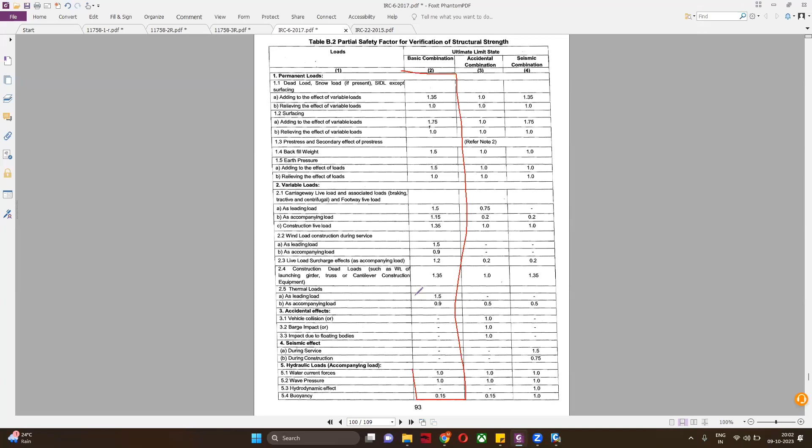अभी बात हमारी लीडिंग और एकम्पनिंग में चल रही थी ना तुम्हारी। तो जैसे इसमें जो कॉलम दिया है वही कॉलम कंसिडर करना है उसके अंदर। अब देखो इसमें ये कॉलम है, ये एक कॉलम हो गया। अब तुम इसके लिए डिजाइन करना चाहते हो, तो यहाँ पे लिखा हुआ है लीडिंग और एकम्पनिंग।

एक बार 1.5 कंसीडर करोगे, फिर बाद के 0.9 कंसीडर करोगे और 0.9 कंसीडर करोगे, एक कॉम्बिनेशन बन गया। दूसरे कॉम्बिनेशन में ये वाला 1.5 कंसीडर करोगे, इसका 1.15 कंसीडर करोगे, इसका 0.9 कंसीडर करोगे। फिर तीसरे में इसका 1.5 कंसीडर करोगे, फिर इसका 0.9 और इसका 1.5 कंसीडर करोगे। तो एक कॉलम के तीन कॉम्बिनेशन बन जाते हैं। ऐसे ही इसमें भी एक कॉलम के तीन बनेंगे, जब लीडिंग जैसे होगा।

तो जैसे अपने इसमें दे रखा है क्वेसी परमानेंट के लिए B3 टेबल का कॉलम नंबर फॉलो करना है। कौन सा, B3 क्वासी टेबल का परमानेंट वाला। तो उसमें सिर्फ बस यही करना पड़ेगा, इसमें लीडिंग कुछ नहीं आता। क्वासी परमानेंट से परमानेंट लोड के लिए होता है, उसके नाम में ही परमानेंट है, तो इसमें वेरिएबल लोड आते ही नहीं।

सिर्फ वेरिएबल के नाम पे एक ही लोड आता है, वो भी थर्मल लोड। कोई और नहीं आता इसमें, ना लाइव लोड आता है ना विंड लोड आता है, सिर्फ एक थर्मल लोड है। तो इसमें कॉम्बिनेशन एक ही बनता है बस। इसके कॉम्बिनेशन अलग बनेंगे क्योंकि इसमें फिर लीडिंग आ गया, इसमें भी तीन तीन बनेंगे, फिर इसमें लीडिंग आ गया, फिर एकम्पनिंग आ गया। क्वासी परमानेंट में नहीं आता लीडिंग कुछ भी। इसमें बस फ्रीक्वेंट कॉम्बिनेशन है।

फ्रीक्वेंट कॉम्बिनेशन डायनेमिक एनालिसिस के लिए करते हैं कौन से? फ्रीक्वेंट? हाँ, करना ही करना है। फ्रीक्वेंट से क्या मिलता है हमें? डिफ्लेक्शन मिलता है। If you want to check your bridge for deflection, then you need to consider frequent. And if you want to check the stresses, you need to consider rare. And if you want to check the crack width, then quasi permanent. Different load combinations will give different values.

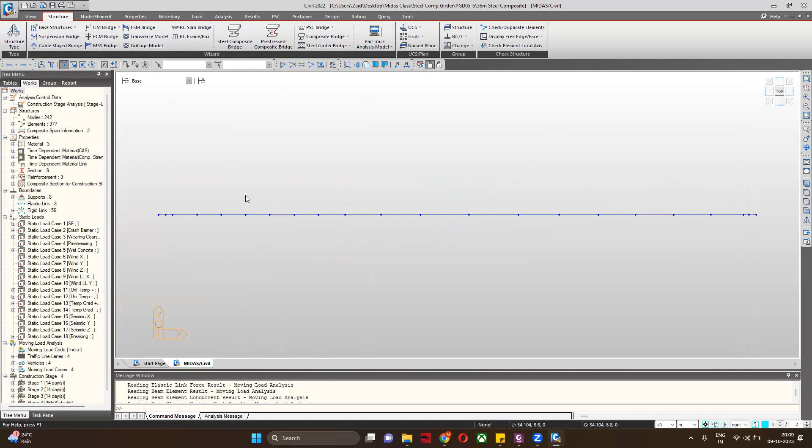Effective width. So I was trying to do it as per code IRC 22. I will show you what is meant by this, also.

But it is still coming empty. Now I will go into boundary, effective width. And from this also, and if I click this thing, okay, if I go back here, I have, okay, that is the thing. Okay, wait a moment.

I have considered this one. So that is why it is giving a problem.

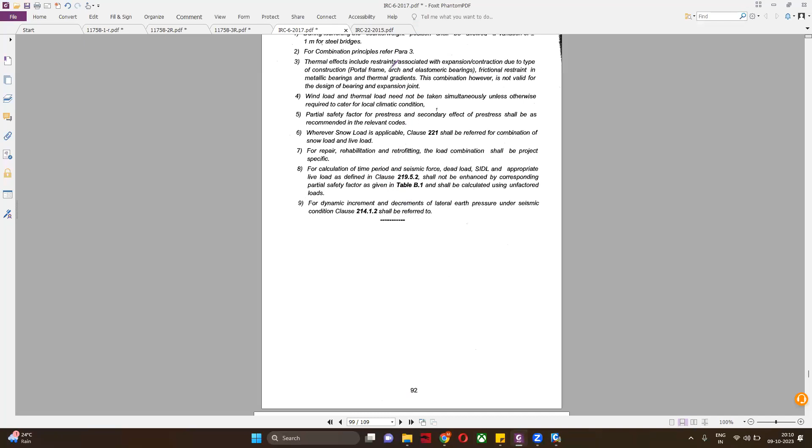Let me delete and delete it because I will show you the code, what I mean by this. If you go into IRC 22 and just go to the initial pages.

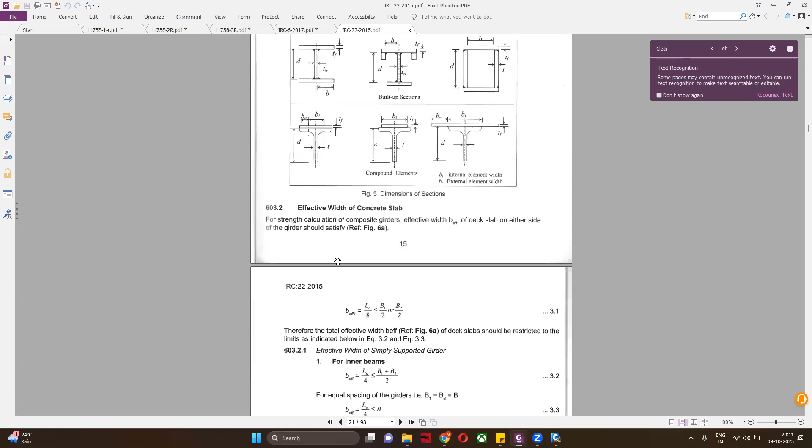There will be effective width calculation. I will go to the last step. First of all, the classification. These are the classifications. This is B, effective width of concrete slab.

It totally depends on: for inner beam, it will be L0 by 4, should be less than B1 plus B2 upon 2. And if B1 equals B2, then B will become L0 by 4. L0 means span. Now our span is 36 meters. So what will be there?

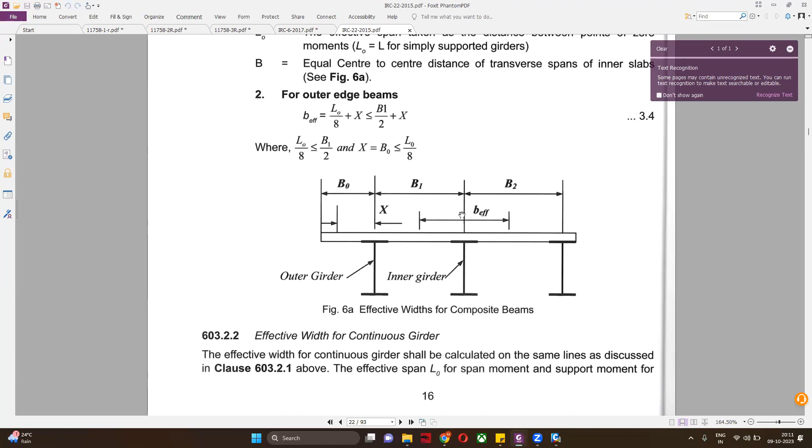Like for shorter span, our effective width changes. But for a higher one, like 36 divided by 4, we get 9 meters, which is pretty much high. So we need to consider the same width, whatever we are getting, like this combination. So B1 is like from one spacing to another spacing, B2 is another spacing, so I'm trying to assign that same thing.

So that is for outer girder, it will be different. For inner girder, outer girder, what will happen? Even outer girder has been mentioned. For outer girder, L0 upon 8 plus X, should be less than B1 upon 2 plus X.

So what you will need? We require X, and this X is equal to B0, nothing should be less than L0 upon 8. So what is our L0? L0 again, 36 divided by 8 is 4.5, still greater than our B1 and B2, which is 2.5. So even if you consider the effective width factor as 1, it will give you an accurate result.

So this is very important for shorter span. But if your span is longer, your effective width will be the same, whatever the spacing between the girders will come, or in this case B0 plus B1 will come.

Like half of B1 upon 2, and this X, or X is nothing but B0. You're getting this, the cantilever distance? This is a cantilever, in cantilever it is different.

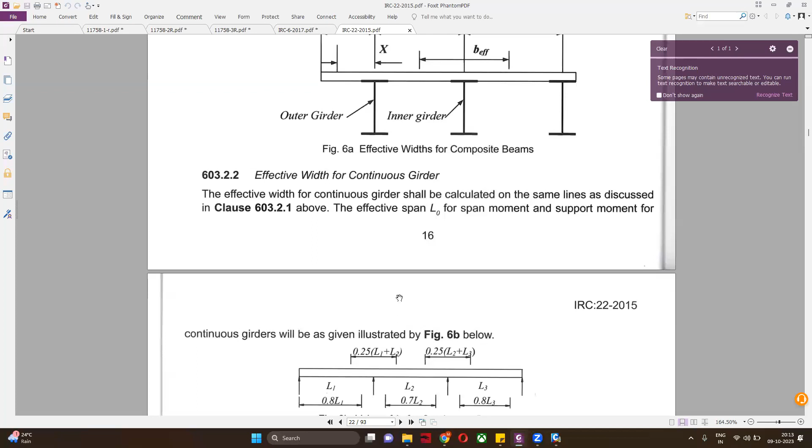Generally, you will not find cantilever steel bridges, you will find continuous bridges. In continuous bridges, our L0 changes. L0 is the contraflexure, one contraflexure point to another contraflexure point, like where your moment becomes zero. From one moment zero to here, they have also shown the diagram.

Or you can consider for continuous span, like if you have this kind of span, so we can consider 0.8 L1 because at this position my moment will change, from negative it will become positive. And from top, it is considering 0.25 extra, 0.25 of L1 plus L2. So whatever is maximum, we will take as the effective length.

Ours is L0, simply supported. Ours is simply supported, but still I am telling you about this in case you encounter continuous girders or continuous steel bridges in the future. So this we need to follow.

This portion. So cantilever here is nothing but B0, no? B0 plus B1, half of B1 by 2. Here it is mentioned as normal, usually how we used to do effective width, same thing.

Like for inner girders, effective width: if your bridge span is less than 20 meters, or 25, 18, 15 meters, then it will take effect, because then your L0 will be less. So that's why this condition only activates when your span length is less as compared to the spacing of the girders.

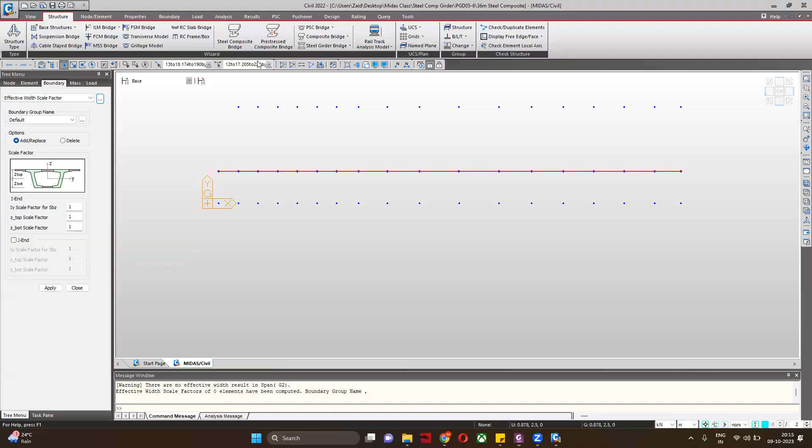Then for continuous girders, it will be totally different. We have to decide based on the contraflexure points of the moment. For continuous, that is what I'm trying to do here.

So is this in boundary? Effective width is there, sir. Yes, in boundary, effective width is there, but it is not being taken. That is why I want to know why it is not taken.

Because like this... I have already given it. Let me see that. This is fine. This is also fine. Should I include?

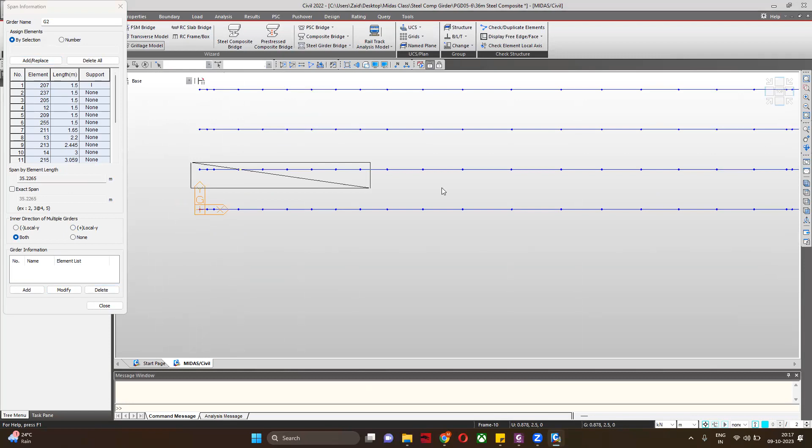So here is my bearing. Should I give the full one? Maybe I will delete and create again. No. There should be one that should come. That is only the concern, okay. Even if I...

It will look like this. One, one, one, one, one, one. Now it has been provided, okay, we'll design the same. Well, designing, this is the governing girder that will be there, and if you go into the results, I need to run it again. Design, composite.

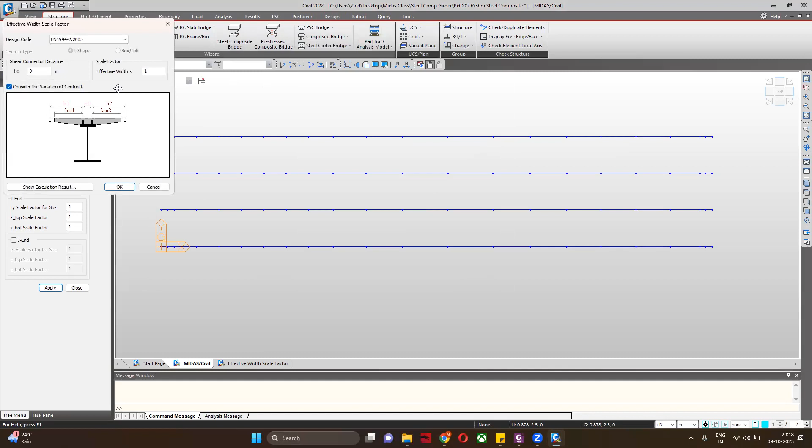How, sir, has it taken the effective width, sir? So I have taken it by this. There are two methods you can apply. If this is not taking effect because it's not affecting, then you can go into the boundary tab. There is also mentioned effective width. Click on this, it will ask you for the scale parameter. So all scale parameters are 1, 1, because my effective width is not decreasing. So I will select the girder and click apply, and you can see all of these by this.

So that's how you can consider also, for whatever girder we are designing. That it is considered. Now we need to go into the design.

What is the meaning of this one, sir? It means whatever width we have already provided, 2.5, it will consider that same thing. By calculating the formula, if we are getting something else, then we have to change the factor.

That is an important thing in your design. If you're not able to consider the full effective width, then what is the benefit of steel design? We need to consider that. So for small bridges, we need to reduce that for a smaller span.

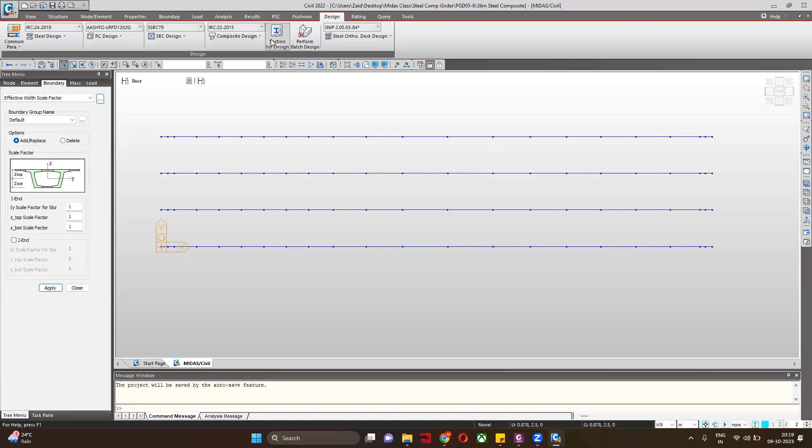In the design part, I think we have already seen this thing, but not shown this. So the design parameter already shown you this kind of parameter directly. Everything is code based, these are all checks we required. So we click OK, nothing else.

Then again design material. In design material again, I think previously also shown you RCC will be M40. I see this, fine, close.

Then longitudinal reinforcement we already provided it, if you remember it here. Then you have design position.

Now this is important, like L by 2. If you remember previously, I have also done this thing. So if I'm selecting, maybe I will show you the result first. Now for this, I need to rerun the model, or I can just directly select what is in between the query.

This to this point is giving around 35 point something. So it will be 36, 18. So here how much? 16, 19. So this I will select.

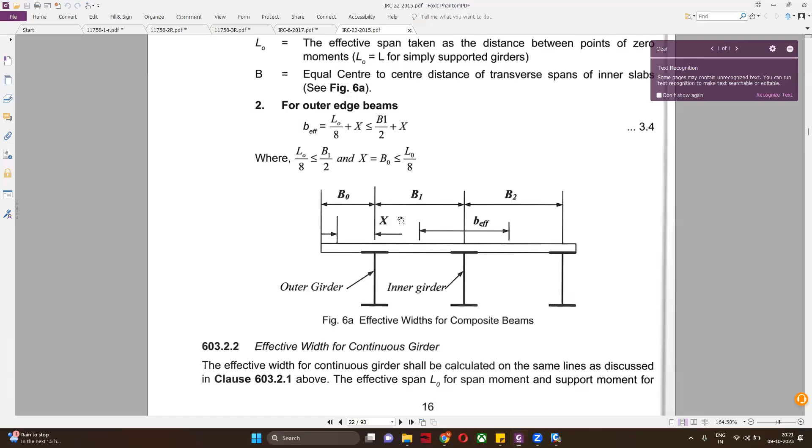Now shear connector. Now this is the important one. I think people have a little bit of knowledge, but I will show you the shear connector. And you can use directly code IRC22 for this thing also. There is shear connector, directly everything was given. If you need to calculate, you can also design for 30.

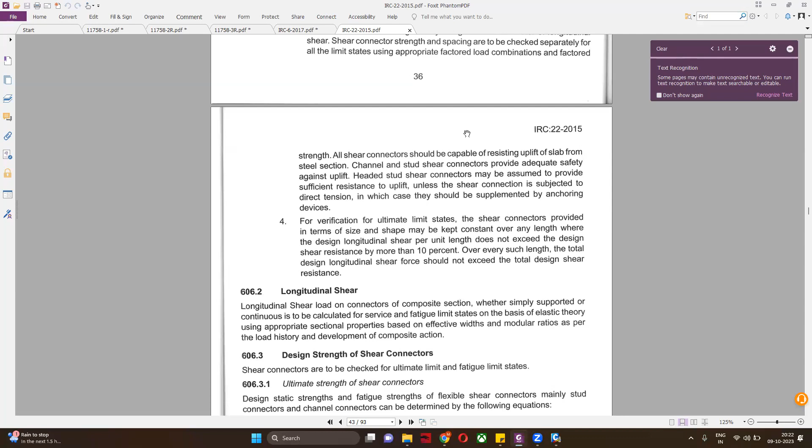Shear connector. If you come into fatigue limit, we have to use the fatigue vehicle, sir. Fatigue is not just a range, nothing else. Generally, fatigue is done for this weld connection, how you're joining the girders generally. But it generally does not give you anything because this is an extra check. It is required for repetitive cycles. So you got a stress range according to the fatigue vehicle in this range. There's some range that has been given. So if we got less than that, that is fine. I'll show you, wait a moment.

Let me first discuss about this shear connector. So in shear connector, we have two kinds of connector. First of all, generally stud, and the old ones which people were using, the channel connector, but we are using the stud one right now. How will it look, sir?

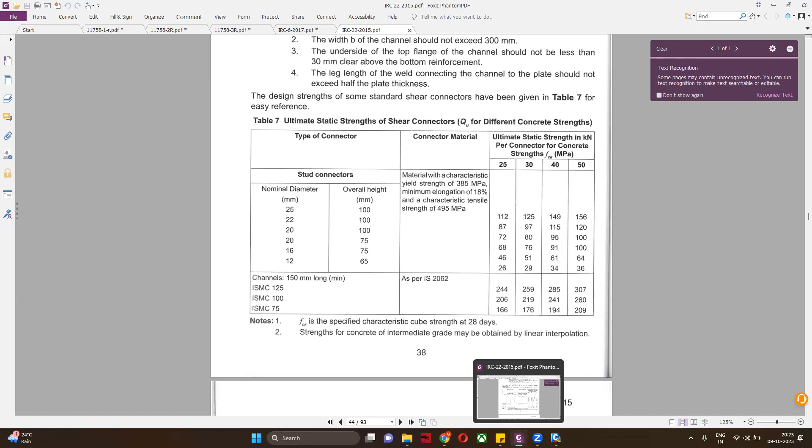Stud means? You have seen ISMC, maybe I will show you. ISMC steel sections, where is channel? Channel, this kind. This is stud we are using. This is angle channel, both sometimes they use it. This is channel, sometimes they also use T. T has been shown or not shown here. No, now stud is which one, that L shape, this one.

This one, this is only, yes, by stud gun they try to do the welding directly to the weld. Now we are using 25 dia, which have height of 100, and which have the FC. This we need to see, FC of 149.

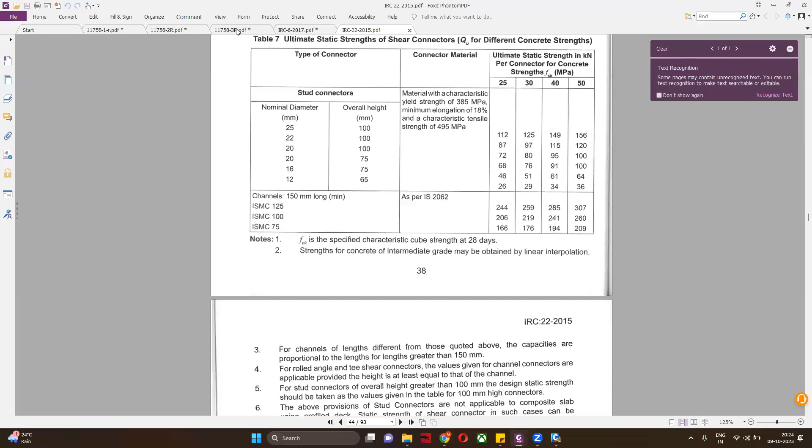So if you go here, connector we are providing on one girder, two connectors or three connectors. We can have a view, on our 4 connectors we are providing. So we can mention here 4.

Ultimate static strength, that I have shown you, 149. Then they will ask you diameter, like 0.025. Overall height 0.1. Center to center, now there will be 2 spacing.

This is longitudinal direction, we can provide 0.25. This will be in transverse direction, we can provide 0.15.

Nominal fatigue strength and transverse reinforcement, this you can assume something. Transverse, like in this direction. Length of shear plane, again 2.5 meter from this point to this point. And now this should be 0.1, in the code it is not given to us.

Which one, these two, fatigue and transverse line? No, this is your reinforcement. No? We need to design the slab and get the reinforcement. We can provide it here, or generally you can put 0.1.

Code by fatigue code strength, fatigue, yes, maybe I will have a look. I remember it, QR formula is there, even if it's not available sometimes. Formula is there, it is there.

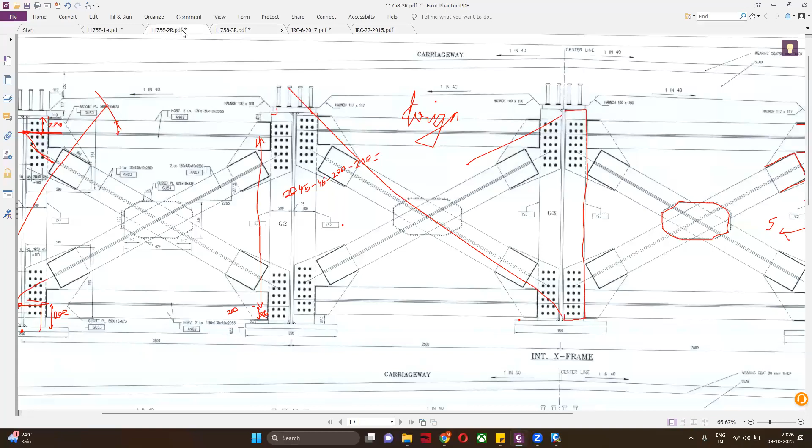You need not worry that code is not giving something like the spacing. There will be stud spacing, na? Can you show the diagram, sir?

The one will be longitudinal spacing, another one is transverse spacing. Longitudinal is mentioned here as 210. So I have mentioned it as 210. Maybe I will change it. This is 210 because it is your longitudinal reinforcement, so it will be combined with your longitudinal one.

That's why it is mentioned 210. And this is your transverse one. Transverse will be in this direction.

You will have two kinds of spacing, one longitudinal, one transverse. Longitudinal how much, sir? 210, na? It is mentioned here. Same I have provided. So everything we have provided, so we will just click apply.

Transverse spacing, it will not be mentioned in the drawing, sir. But this transverse is 150, not mentioned, but you can get it a little bit by this. Like if you come here, 100 has been mentioned. I have provided, no issue. If 150 is okay, that is also fine.

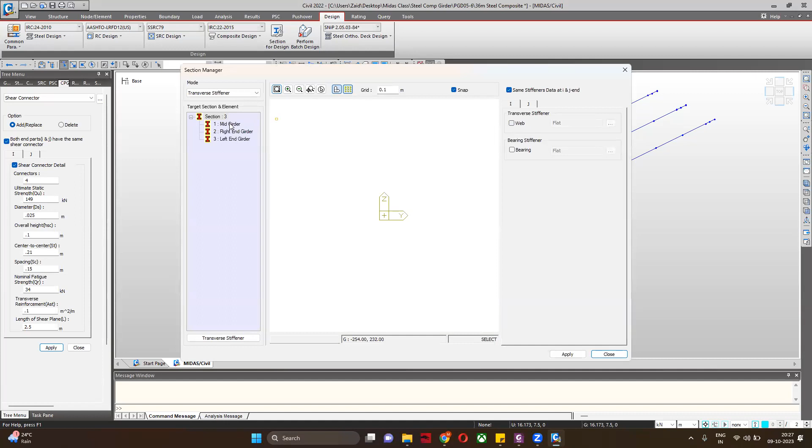Longitudinal, transverse, now stiffeners will come. You can provide stiffeners also. Web or bearing - click on this, click web, bearing, click on this, flat, one stiffener, two stiffener. So it will be two stiffeners, and here you can choose flat or T.

Now we can also define Fy. So Fy again will be the same. If you remember it - I remember it, 34500. And pitch, now pitch is important. Pitch we will give as 6 meter.

Here B it is asking, it is given 1.15, and thickness I will give 0.012. This I will again go to update. Maybe where is my steel code?

I guess these distances as per drawing, sir - this pitch and this and everything. No, I have considered the maximum one. You can see here, yes, it is coming.

Okay, and bearing also we will provide it. 3500. What is the difference, sir? Both stiffeners - I will tell you. Bearing stiffener is sometimes a little bit thicker, like it will be part of your end diaphragm, 20 mm thick.

Or maybe we can see it, I will show you. Bearing at the bearing location - there will be no web pitch, it is at the web location, sir, at web location. I will check the thickness again to confirm. It will look like this, but...

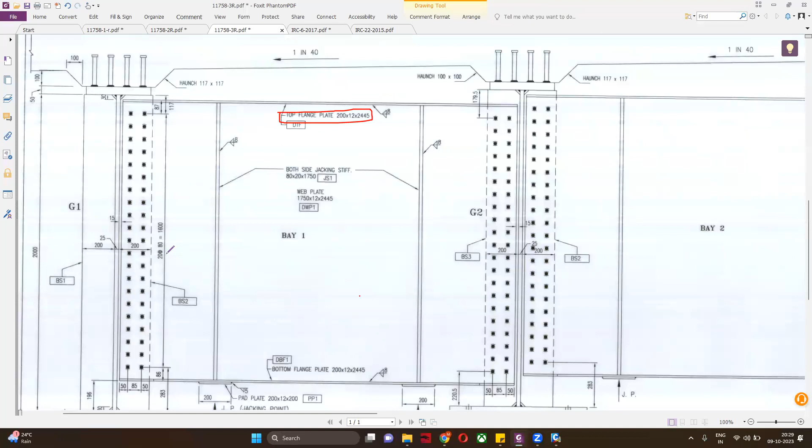This is my bearing location, so this is the stiffener. And how much have they mentioned? BS2 plate number has been mentioned, 200 wide they have mentioned. Any other thing? BS3 plate you can easily see.

BS1, BS2. But they have mentioned here - some other place they might have mentioned. If you look here, then you can see 20 mm. This stiffener is 20, and also this is my end stiffener which will be this bearing one. This is also 20, really. So I'll provide this 20.

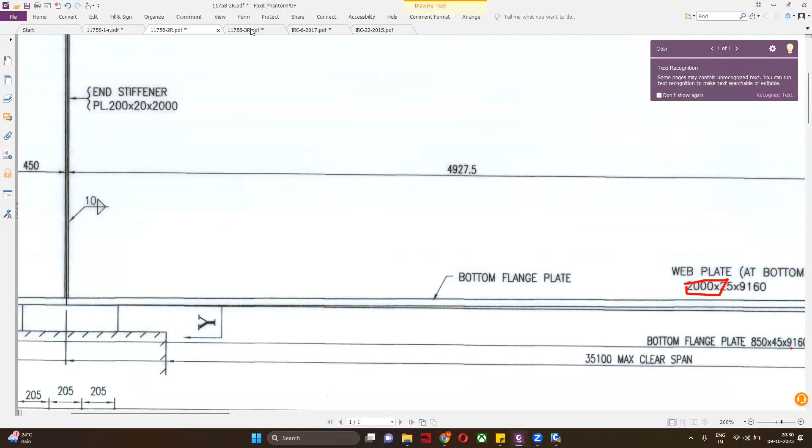Okay, apply, close this. Another direction is 200, sir - width. But okay, here you can see - not in this, but in this drawing. Here it is mentioned at 200 mm, this thing.

Okay, here two stiffeners are connected, so this side one stiffener, this side - left and right, both. Okay. Same as shear reinforcement, we consider it, na?

So now this will define transverse stiffener, lateral torsional buckling - yet this will not be required because we already provided it. We will click yes. Now here, this is important - unbraced length, again we will consider the 6 meter.

This is which distance, sir? 6 meters, the distance between your bracing. The maximum was 6 meter, na? Okay, bracing spacing, sir, yes. Maximum. Then we will have the fatigue detail.

Now this is important. Generally, this does not - I need to see unfactored nominal fatigue strength, unfactored, and uncorrected correction factor. What do we have, corrected nominal fatigue? Just one moment.

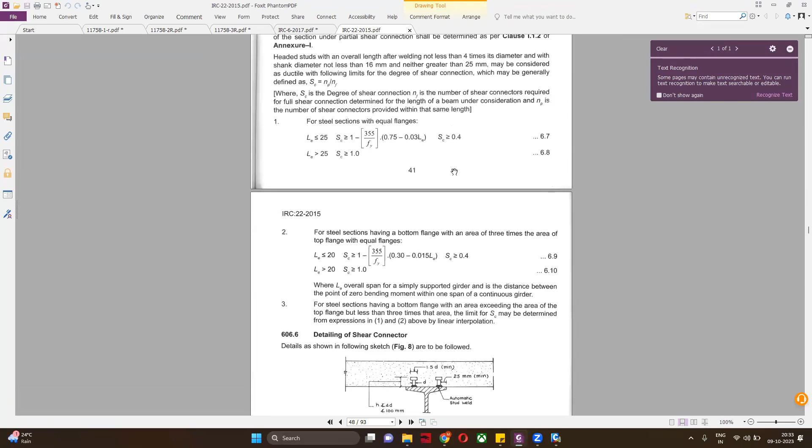In code also, that is what I'm looking for - also unfactored nominal fatigue. It is for the shear stud. Everything is available in the code, you do not need to go anywhere outside. But just the things are...

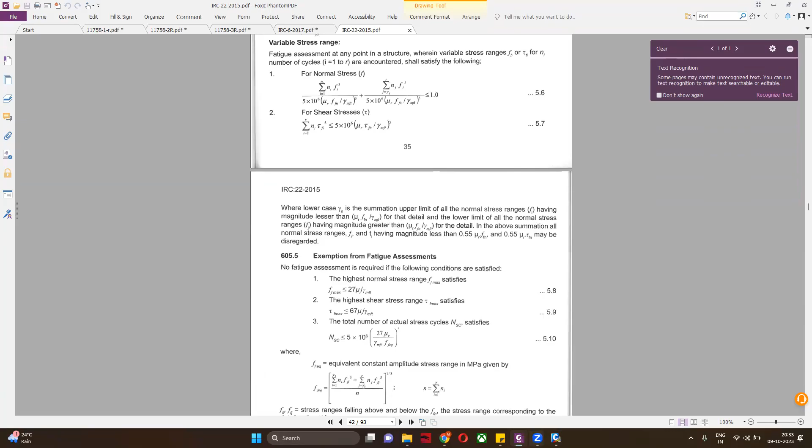...upside down, we need to go sometimes up, but not required. Fatigue is the mu - we can mention mu, and this is generally the correction factor which remains 1. But FF and TF are important.

Has anyone seen the SN curve? Known a little bit about it, because this is a very different kind of thing. If I tell you, you are not going to understand. These are used for the fatigue strength to get the capacity of steel. Generally for offshore structures, we only use SN curve or API charts. I think if anyone knows about that.

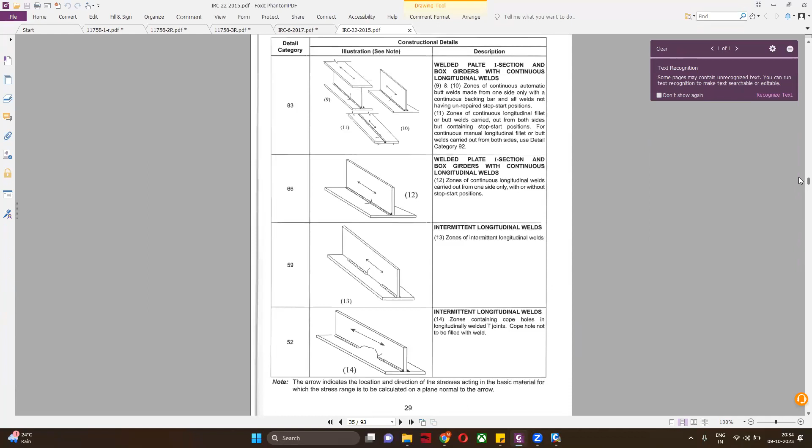SN curve means this, what will be plotted, sir? Just name it, the stresses and the fatigue limits are there according to the number of cycles. We are considering load, but you will not find a normal thing. This is only used for offshore structure or some steel, a little bit.

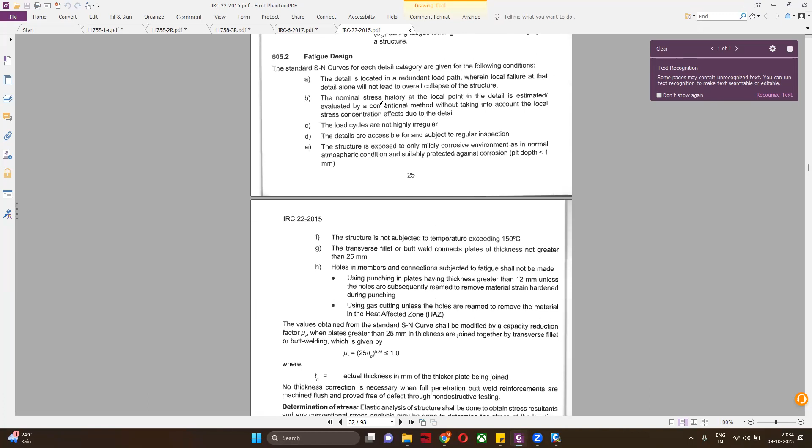This SN curve, generally all steel design is based on it for offshore or onshore structures. Relationship between what and what, sir? Fatigue and cycle, the fatigue and the stresses according to the number of cycles. Okay, like number of cycle, load will be applied on this. So I'm looking for FF and...

Shear fatigue, what is this? Uncorrected nominal fatigue. Uncorrected nominal, design normal and shear fatigue range detail respectively for life cycle.

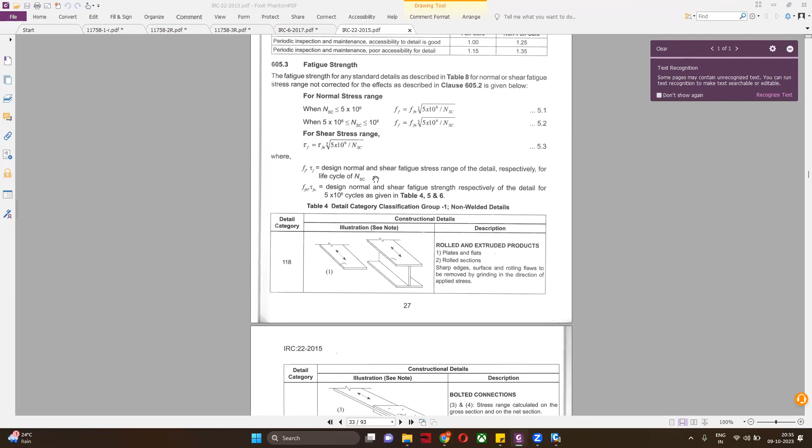See, this has been mentioned. I know the value, but I'm looking for where to get the value. Because I know FDD will be 92 and the other one, τf will be 67. But I was looking, these are some, according to the weld, there's some idea of how the connection should be made.

This is the SN curve corresponding to cycles. You can see number of stress cycle, uncorrected fatigue. It is here, and corrected. Now we need to see for which number of cycles we have, for 92. Okay, we need to consider the lower one.

And for 10 to the power 5, okay, we will consider this 97 for this point, for the minimum 10 raised to the power 5. Because for bridge, it is not regarding the cycle. Generally, this is valid for a lot of steel, not only for bridges.

And there will be another one for shear also. Number one for the strength, FF has been mentioned. Both are same, sir? No, not the same. This is for different things, shear stress curve for shear stress. This is strength that has been mentioned here.

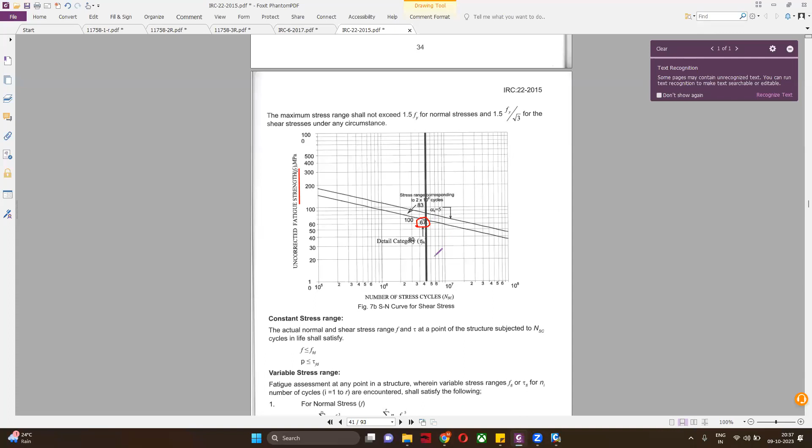Wait a moment, like 4 into 10 power 5, or how much? I need to first, generally in this we are considering 97. Where is... 100. We are considering 5 into 10 to the power 6, or around this position. And this should be 97, should be here, that I'm looking to find out.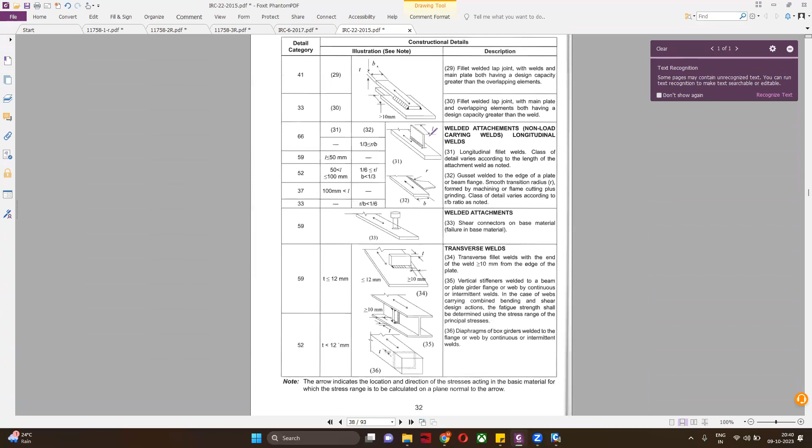If you look here, we consider it for 5 into 10 to the power 6 for normal stress range. You can see that when NC is less than this, so we generally consider this condition, 5 into 10 to the power 6. So this is coming at this location. This will be at this location. We consider it 97, that's why I remember it as 5 into 10 to the power 6.

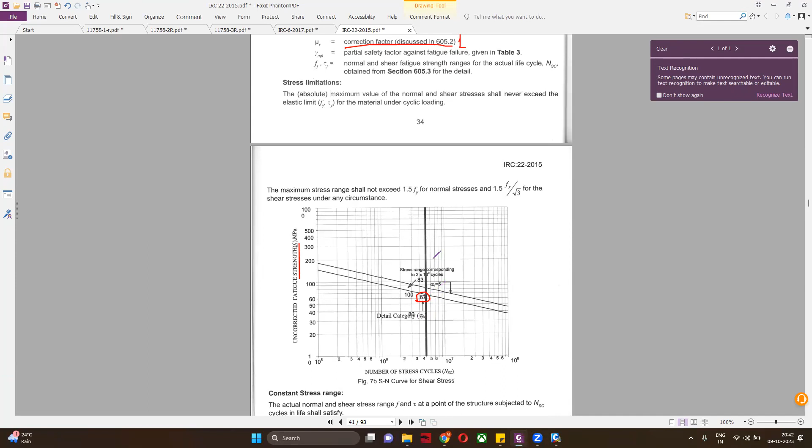And in this, it has been clearly given, we consider it directly this. In the upper, so one only we couldn't look at, there is something, I also am not able to use it very quickly. But this is the line we need to consider. You got this thing? This is because 5 into 10 to the power 6 cycle is there.

But this value, 97 will come, that I also remember. This will be at this location, at this location it will be correct. Okay, okay, just consider it. I know the limit is 97 and this is 97. This is 1, and that was it.

67, so the same will be there, 67. And you can select, one is again which one, sir? Correlation factor and correction factor. So it will generally remain the same.

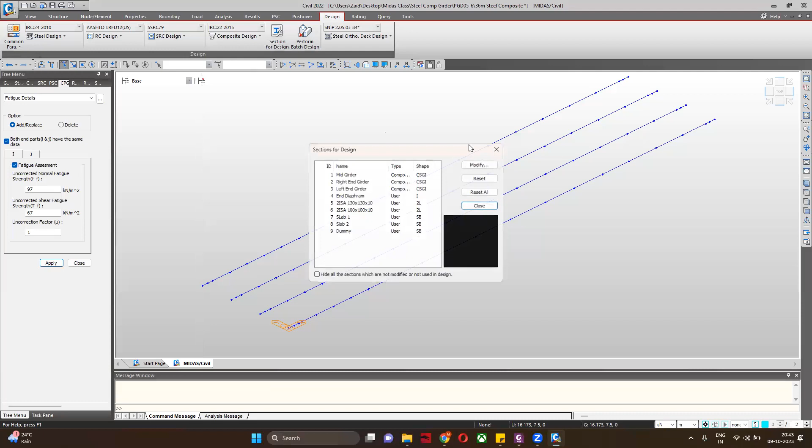Select, apply, we go again into result, not design. So we have provided fatigue. Now serviceability load combination. For this, again we need to go into our loads, results, load combination. So here in composite design, if you remember, I had shown you from where it is starting, from characteristics, from 76 if you need. It is already considered in steel design, I also need to consider serviceability in this spreadsheet form.

You can see the normal form. Characteristics, frequent, quasi-permanent.

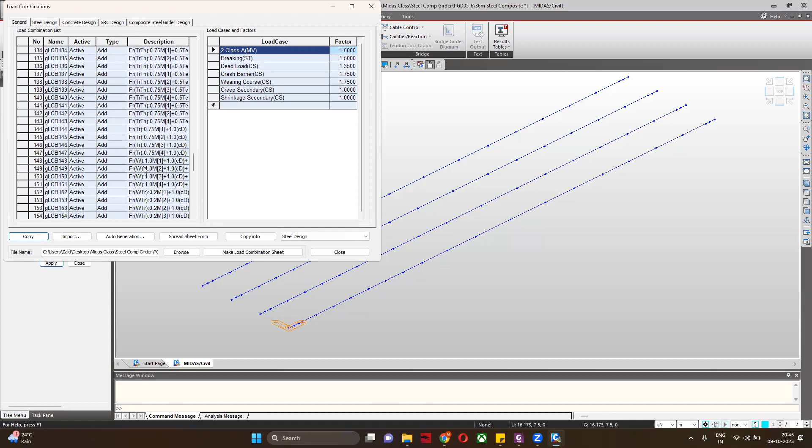So that is fine. I need to also consider one thing in the loads - what are the characteristics up to which point and from where. Now if you look at here, 76, it is starting. 76 to 126, then 127 to 185. One 26. One 85.

Now let's see, fatigue, we have given everything. This is not required. Now first run the model.

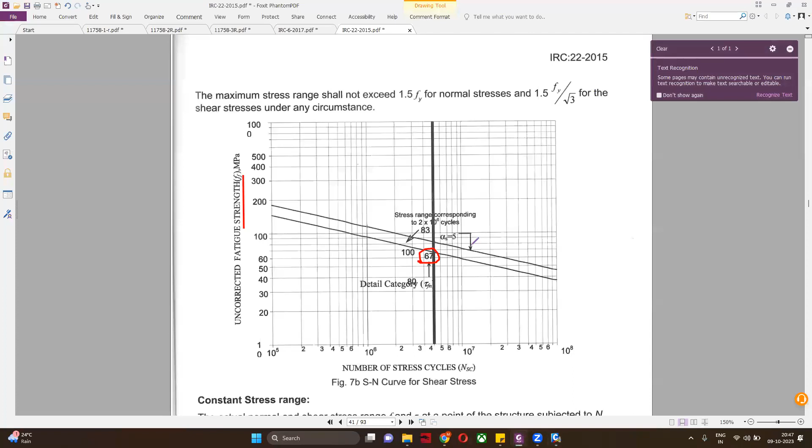In Delhi, rain is there, sir. Huh? Rain, rain. Ah, yes. Bangalore is raining heavily. Ah, Delhi does not have rain. Delhi got this back, the summer type of feeling, humidity. Bangalore is good, you have rain on. No, Bangalore is raining heavily. So always there will be rain, roads will be filled with water. Yes.

Now the model is run. Go to here, design.

After this, slab design is also there in this as well. No, that slab will be different. Design.

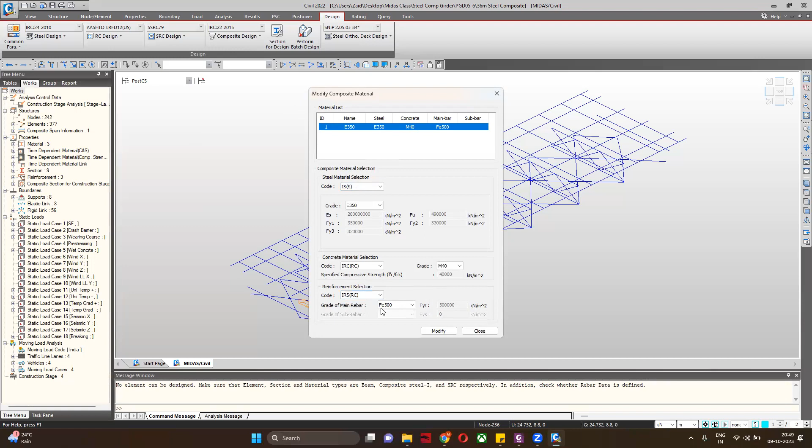Already provided IS, that is fine. Okay, I have selected batch design, but SRC, I'm not doing SRC. Analysis. Concrete beam design, concrete beam checking, concrete column checking. Why is it not taking design position?

Okay, so that's 14. It is saying no element can be designed. Make sure element section and material types are beam. For properties, reinforcement, everything I have provided complete, time dependent, and then composite girder.

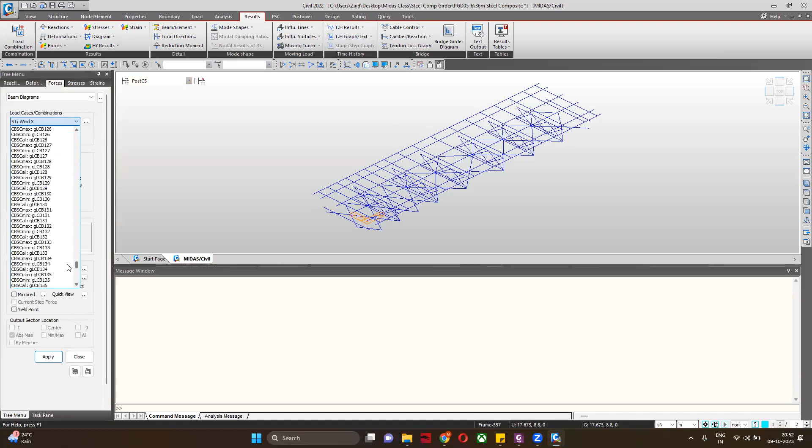Why does it not take it? For system, everything shear connector. Okay, design output position. Design output position was missing.

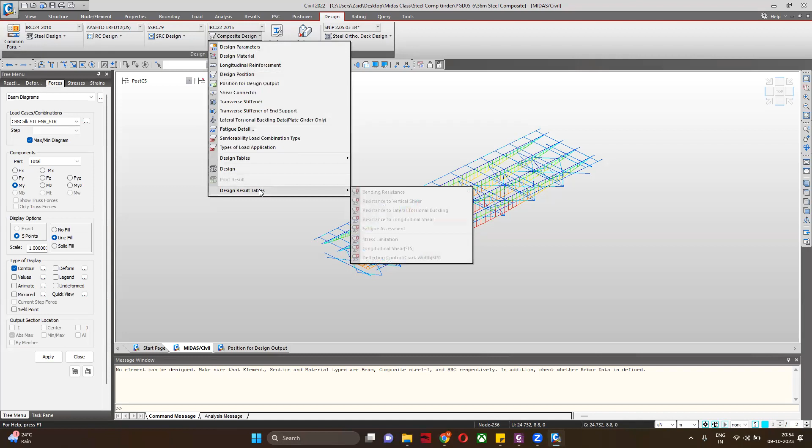I have given it, why still it directly comes like output. Why is it not taking care? I will go back. So output position IJ 14.

And I will select again all things, what can I do if it's not designing. It is rotating but does not give any output. That is the main concern.

So it should generally come here, design position IJ. Here the element is going. Why is it going, I do not know. Maybe design material, longitudinal reinforcement there, design position. Shear connector I can provide again. Okay, maybe I will do it again. Design position 14.

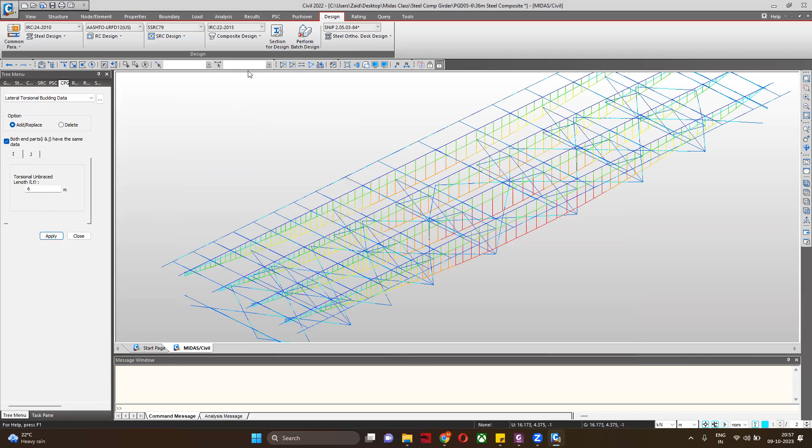And the fatigue detail we have also given. Serviceability, load combination we have given. Type of load application already there.

Something is not working in this. Let me check to complete.

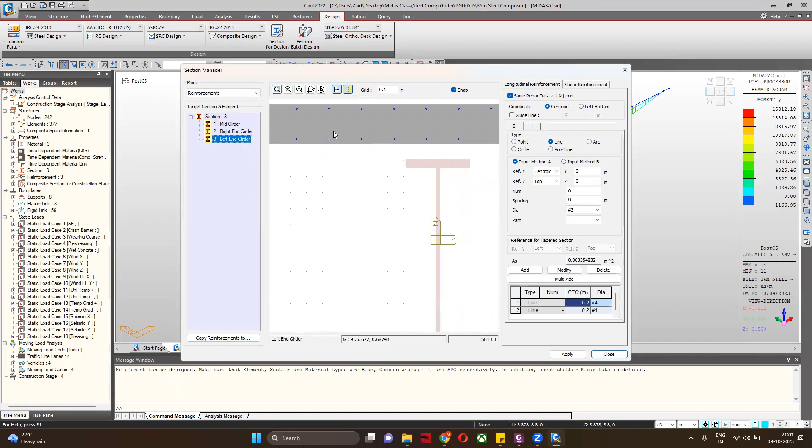Not like we have not provided. Properties should be beam something. It's steel section and material - that is the thing. Types for beam - that is the thing only which is causing this.

I will go into the section mid properties. Maybe I will again update this thing. But it is already provided, but sometimes this we have provided, but we have to again and again update this, sir. No, this is the first time I'm doing this generally. Maybe because of this it is happening, or any other reason - I do not know the reason. This is kind of error.

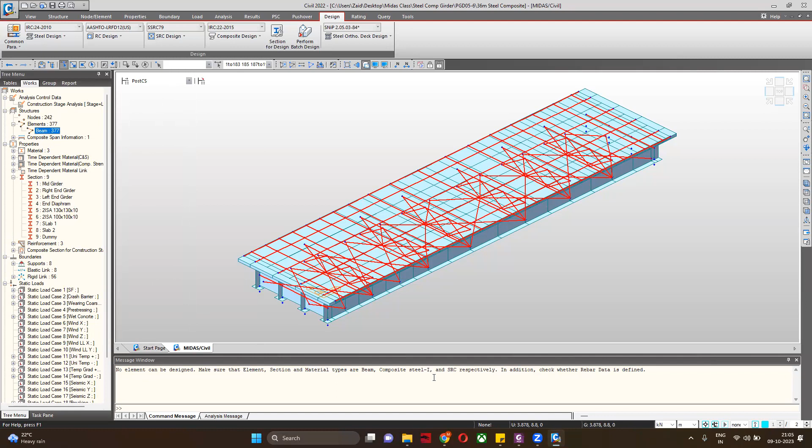Everything comes. No element can be designed. Make sure that element, section, material types are being - make sure that element, section, and material types are okay. Make sure that element as a beam, section composite steel, material types are SRC. No material type is shown.

Maybe name that this thing - I need to define it like this. Just confirming this theory also. This material is for which one, sir? Just checking, I'm not doing any other thing. But if this information is correct, then I need - what is this saying? Material data of elem. type cannot be...

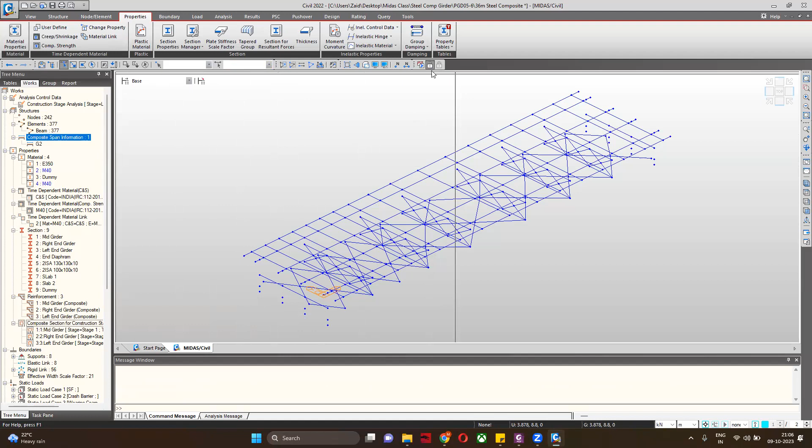Getting, no - what, sir? Wait, it's not - it's an error. It is showing that your material is not matching with the properties which we have set.

Full power cut and Bangalore is raining very heavily, sir. Power cut and Bangalore is raining heavily from 6 o'clock to 10 o'clock. So okay, you have a lot of power cuts because of the rain. Yes, daily evening 6 to 10 rain. So now I think you're fighting for this water. Something is going on. I've seen some Kaveri issues there - Kaveri water, that is there, between Tamil Nadu and Karnataka. But Bangalore was doing some strikes too, no? Yes sir, so for 2 days there was work from home.

Okay, you can see here - no element can be done. Make sure element, section and material types are beam. Element is beam type, section is steel composite, but it's saying material should be SRC. That is giving little confusion to me. Material is - beam, we are considering steel composite. It is a steel, full steel material, na sir.

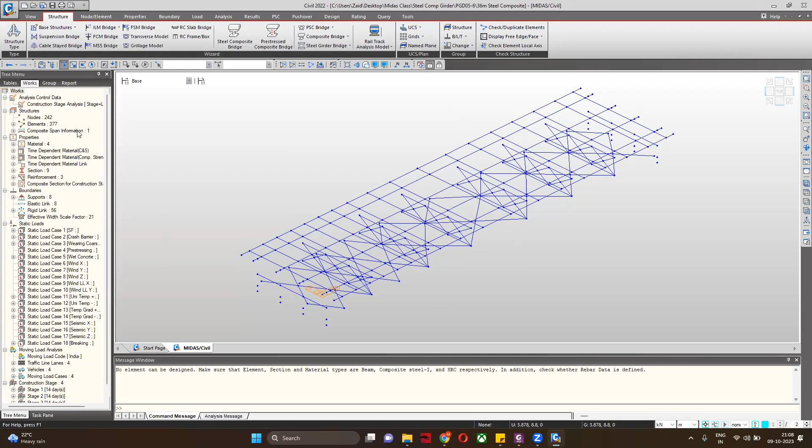One SRC means like this composite - steel inside concrete, steel is there. Steel reinforced concrete means that. Yes, so that's what I am trying to do, to change the structure. Where is my property I have created now? Material - it is saying. So then what I need to do? I need to do a lot of things - time dependent property I need to change. First of all, come here. Then a lot of things need to be changed because of this one thing. Maybe that is a thing we are doing.

So if I select here and go into material and select M40 - yes, select this composite information. Okay, it is taking the information. Okay, fine, got it a little bit. Now I have - if you remember this, this should go here. This should come - this SRC is M40, sir. Name: M40. Close. For deck slab, we have given some M40, no sir - this is also the same name.

Here, this will be. Now the main thing will be there - it is calculating, not able to calculate this stiffness. Material, my element 2 is slab. But now it's getting confusing - to him, material is also, if I select element...

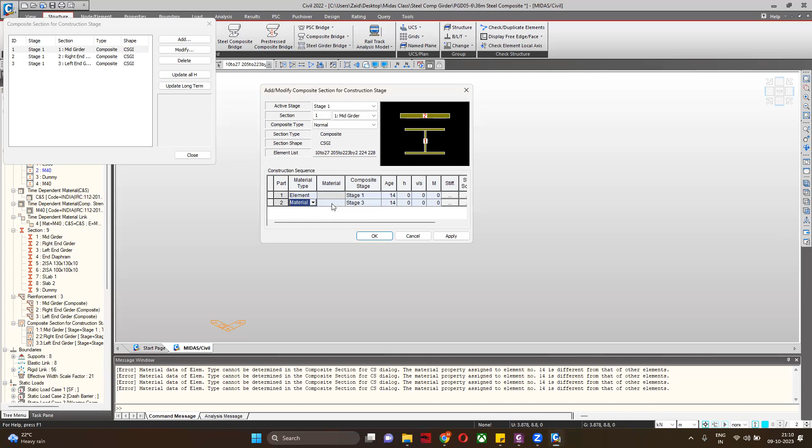The number is different from that of other material. Material cannot calculate stiffness - now it is showing this kind of error. If I run it, it will give the error that material data of the element cannot be determined in the composite section - whatever is assigned to the element is different from the other elements. Okay, okay, then what I need to do? I need to change my entire thing.

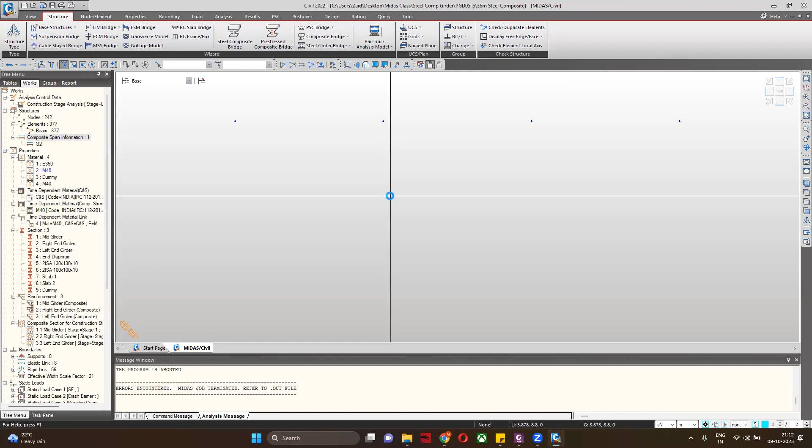Now say if I run it - in that CS we have not changed anything as well. Yeah sir, yes, now in something is construction stage, yes. What is it saying - the individual element stiffness will now be formed. Why is it not forming? Now something is happening to our... if I go to stage 1...

This is fine. Okay, if I come here - yes, composite section cannot be added. Okay, this is causing something.

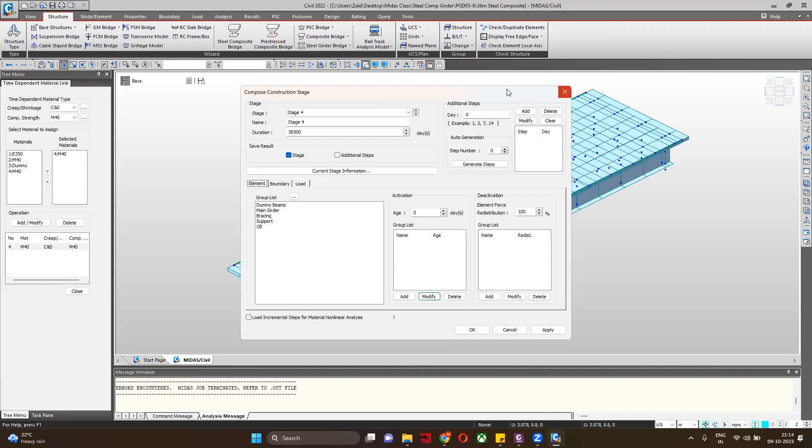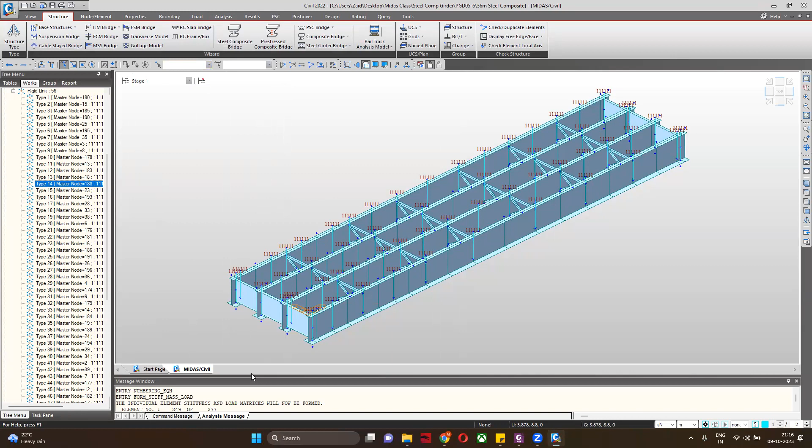What kind of error it is - the total number of wires, degree of freedom, the individual element stiffness and load matrices will now be formed. Element number 249 of 377.

Fine, but due to this composite deform information... okay, I will prove that. Okay. To run and check why it is giving an error.

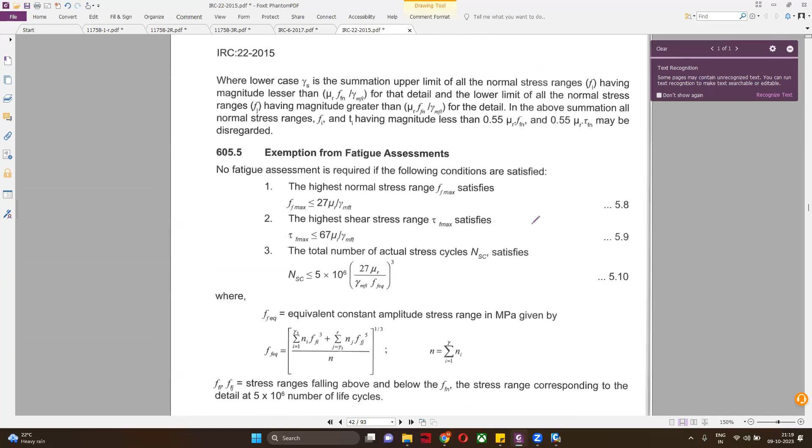No issue, I will solve it. Everything you got it. Generally, even if you do not have this data available, we can still design it by the same method. Let me show you what's happening here. I'm not in the code, but then you can design it.

I'm showing it, but generally all these formulas will be represented there only. We other, anywhere, any steel composite design you have done with this same thing, sir? I have done it, but 2 years back. That is the steel composite one. So right now they have updated it to 2023 or 22. I do not know, maybe the material.

I want to change it, sir. I will first check it. But this is the same method I follow.

Okay, SRC, material means... SRC is known as Sulfate Resisting Cement? No, not sulfur. SRC is like Steel Reinforced Concrete. It's the same, like if you have a steel tube and provide concrete in that, or you have a concrete slab and provide steel in that. Something where both steel and concrete will be there - then it is known as SRC.

But SRC, we used to design like this. This is SRC. In India, we do not have any code supporting it. There is only one SRC code available. So Indian code does not allow it. That's why I'm a little confused why it is asking me for SRC.

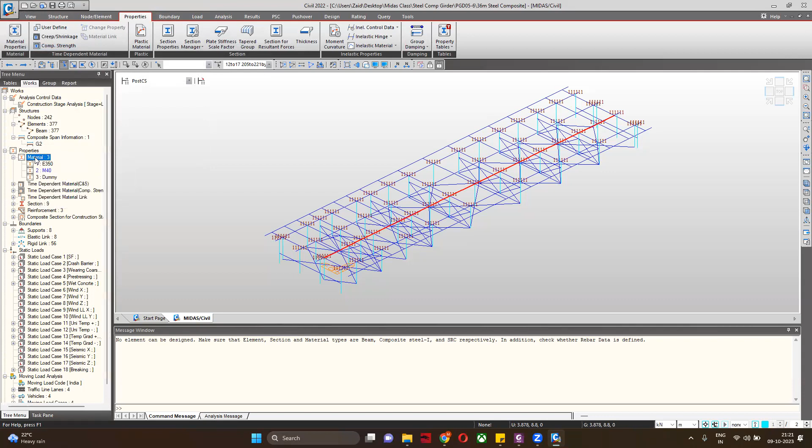And then it is saying material - now the main question is this material. Why is it asking me to choose? Because this looks like this SRC. If you click, it will look like this - steel, concrete with steel sections.

So generally it does not happen like this. Maybe Midas has some kind of internal intuition - it sometimes doesn't give this, sometimes it gives it. Maybe I will open the laptop again and it solves the problem. Midas is like that - it will create a problem, and solve it automatically. You will not be able to know how the problem was created and how it's getting solved. So sometimes Midas has a tendency to work on it.

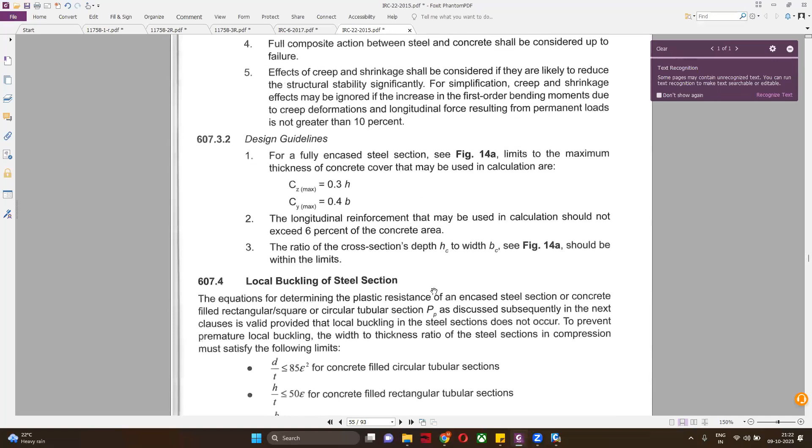Some old reference file or old designs, whatever you have, you can just check it out and tell me tomorrow. No issues, but I will tell you what it is asking. This is the SRC design - this is an encased concrete, encased steel column. This also all comes in the SRC kind of thing, but generally we do not design like this very easily.

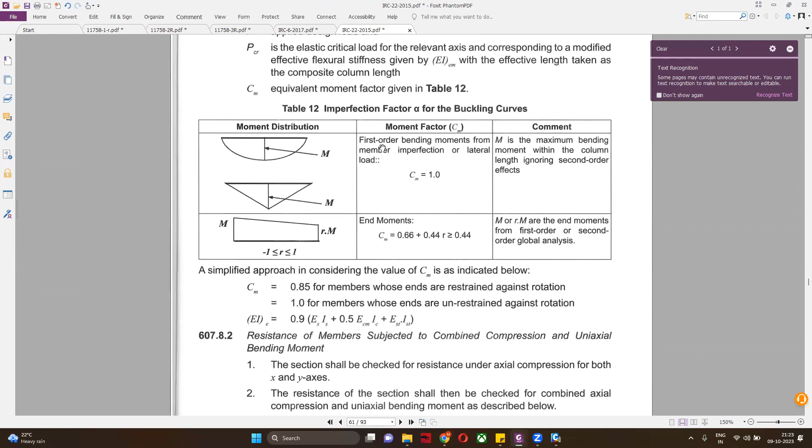Let me show you what I want to show you. This comes in the moment factor. Buckling - this is buckling. I will give you, but generally we need to check. So I'm looking if that formula has been mentioned in this code, or then again we need to refer to IRC 24. So IRC 24 is fine.

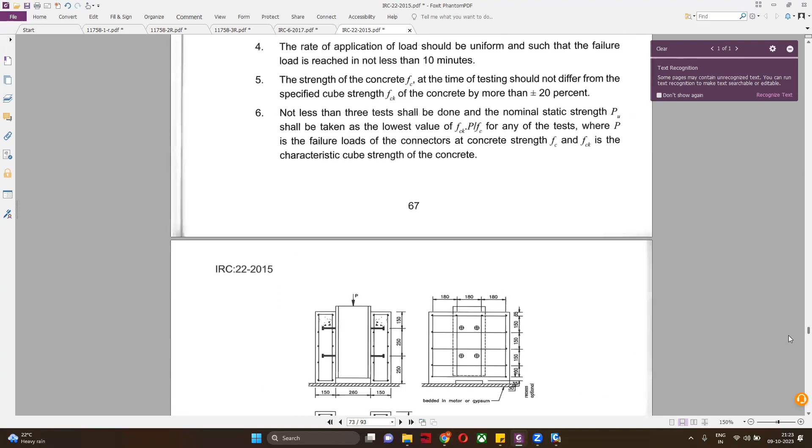You can see B effective will come here again - same thing, nothing else. MP, okay, here will be one. What I'm looking here is to give you the plastic neutral axis. This is the property they are calculating, but the property I was looking for here.

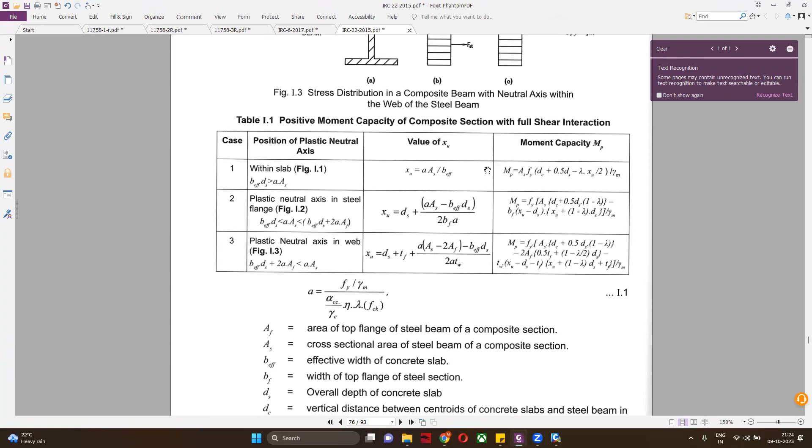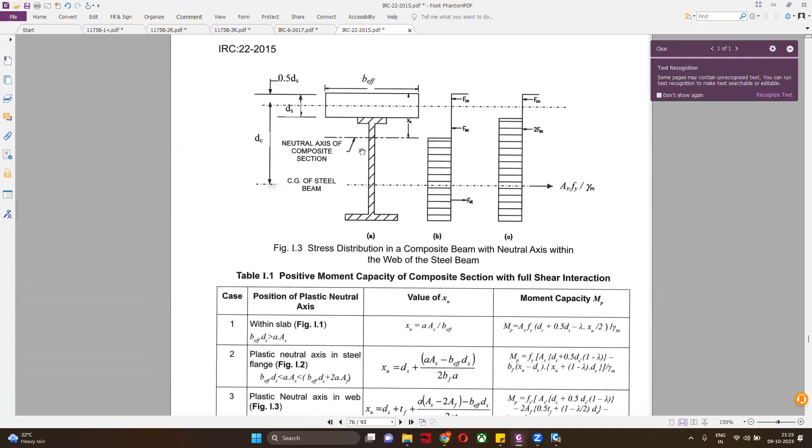We divide the B effective wherever it has been mentioned. There is one more thing - after becoming composite, your effective width changes. How will the neutral axis be? Before composite, after composite, where will it be? It will be changing now because of this B effective. That is what I'm looking at. I want to show you that, it will clear your doubt.

Here I'm looking at this because B effective is going to change after composite. Before composite, it will be fine, but after composite, it depends on SIDL. For dead load it will be fine for self weight, but for SIDL and live load, it's going to change. That's what I'm looking at.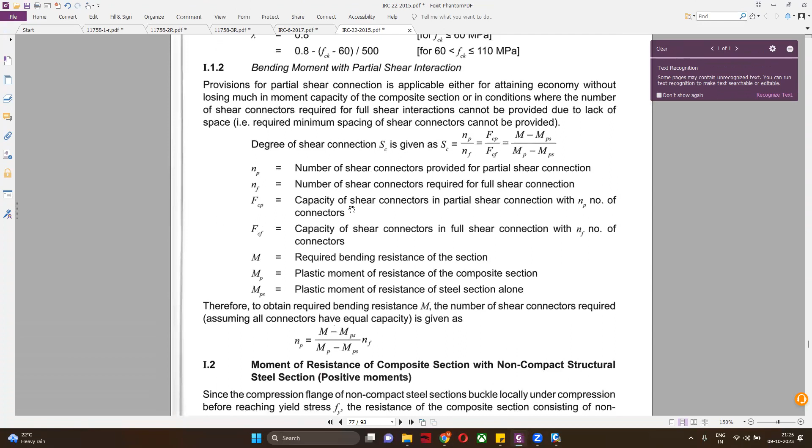Non-composite section negative moment. The formula is the same, that is Zp fy upon gamma m. Where is that formula for effective width?

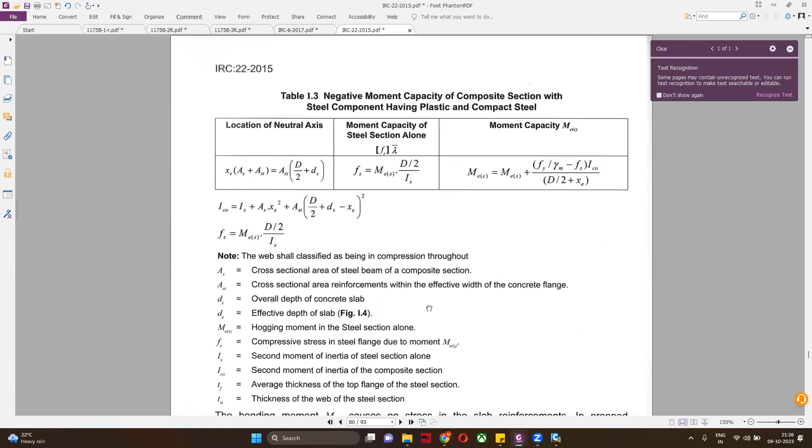Flange, construction stage where our steel will be there, and we do not have any concrete over it. But where is that main formula? Generally I will explain, but maybe I can give you it from the code itself.

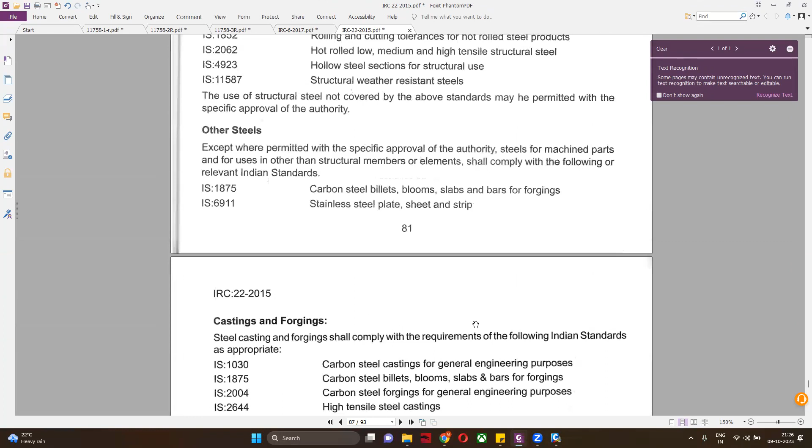Material properties - nothing they are giving. Okay, I will explain to you what generally happens in a steel design.

So in normal steel design, you have already seen that it does not have any kind of issue. Like if you have any kind of section - I section, C section, angle section, or T section, angle T - or then you have tubes, rectangular hollow tube, square hollow sections, then you have circular hollow sections. So these are different steel sections.

But in this, all sections can be built up sections. Some sections can become directly hot rolled, and they can also make built up sections. So what is meant by built up and hot rolled section? Built up section means different plates you are going to attach with welding and create one section. And what is meant by hot roll? They will be directly molded into accurate I shape, C shape, L angle shape, T shape. So that is what is meant by hot roll.

So whatever you choose, we require properties like moment of inertia, section modulus. So those are the important properties you need to calculate. Now in steel bridge, what will happen?

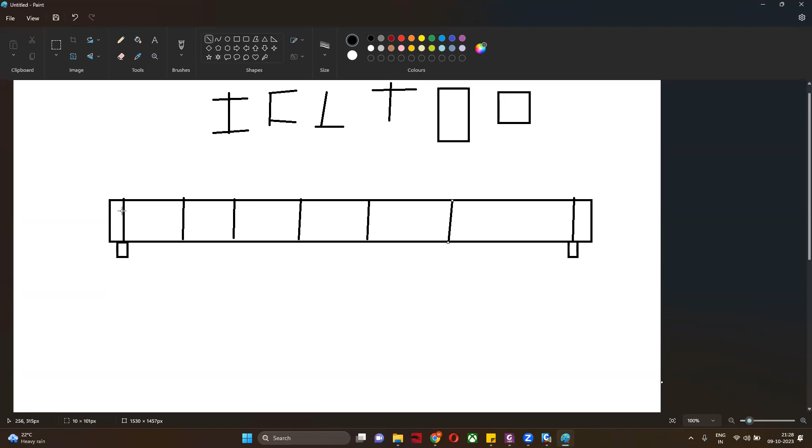First of all, our steel girder will be going to be casted like this. We do not have any slab, and they will be rested here, and we will have some stiffeners - this is mid stiffener, this is end bearing stiffener, these two, and these are mid, maybe all over along the length, normal stiffeners. So this is the one. Now you will cast this thing.

Ours is built up type of section only, sir? In bridges generally it's built up. So now we are casting the slab.

Okay, now slab has been casted. Due to slab, there will be self weight of steel also, and slab green concrete weight. So we need to check our steel for only self weight and concrete weight. That will be a simple formula - MP equal to ZP, section modulus into fy upon gamma m. So this is my moment capacity.

I can directly check. There is one formula for shear capacity also, or axial capacity - both, everything shear, even the axial capacity, like if I remember, axial capacity will be area of your girder, area into Fi divided by gamma m. You will have axial capacity, then there will be shear capacity, or maybe another minor axis. This will be the major axis, like if you are calculating MPZ, then there will be MPY, and we need to combine all this, and it should be less than 1. So this is normal design for a steel girder for all over the steel.

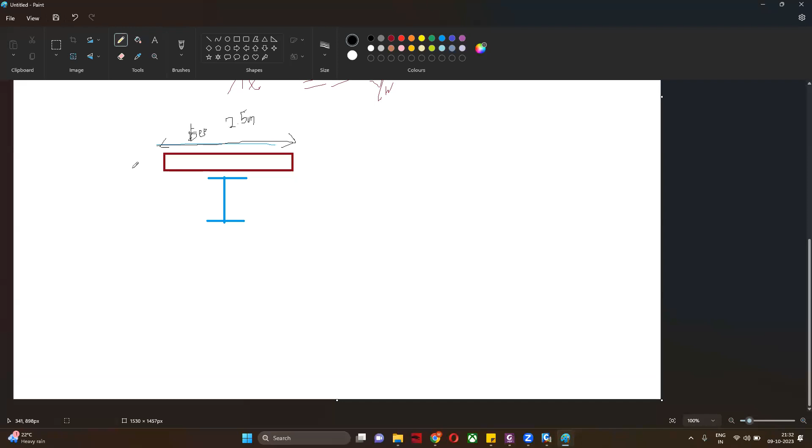Maybe this number. So this is BE effective. If my distance is 2.5, it will remain 2.5 meter, and the neutral axis will generally lie above my steel girder, at this position or at this position, when I'm considering 2.5.

Now another step is this. This 2.5 will be divided by some number, like there is a modular ratio. This will be divided by modular ratio. What is modular ratio? ES upon EC, modulus of elasticity of steel upon modulus of concrete. But why do we divide it?

When we check for SIDL. SIDL means superimposed dead load, due to your crash barrier and due to this slab. Sometimes we also include the slab weight, and also one more wearing coat. So for this, we divide by modular ratio or by 15 for SIDL. This 2.5 will only remain if you divide it. All formula remains same, nothing will change.